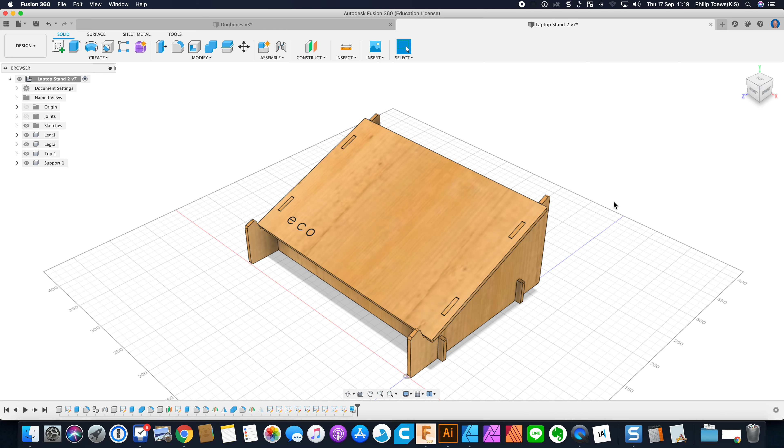In this video, we are going to learn how to output our files on the laser cutter from a 3D model. In this example, you can see we have a laptop stand, and we want to get these parts into a format that we can then send to the laser cutter. This takes a few steps, so pay attention.

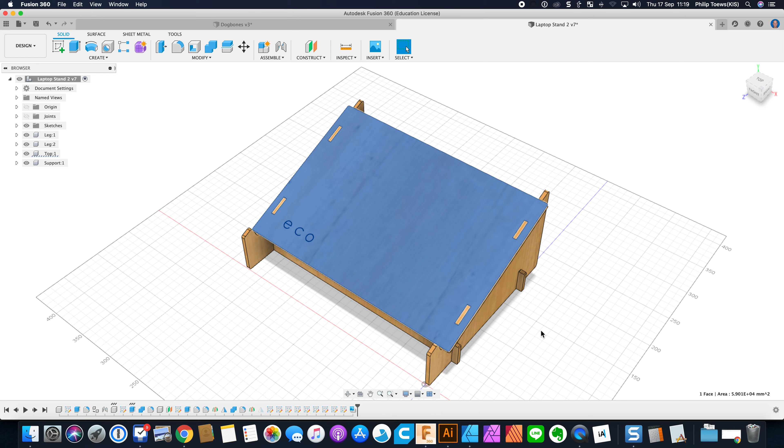Here we go. The first thing I want to do is cut out this top, and you can see when I click on it, it's got some holes cut for the joints where the legs fit in, and some nice rounded corners. By clicking on it and selecting it, I can see its actual sketch profile. I need that sketch profile exactly as it is in order to get it into Adobe Illustrator.

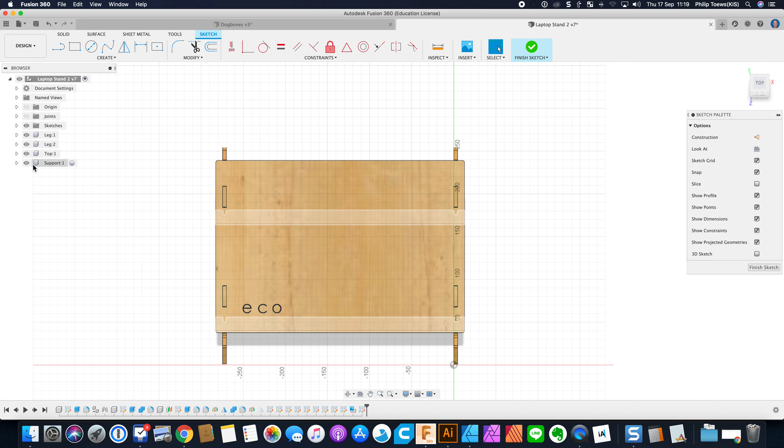So I'm going to right click on it and say Create Sketch. Once I create that sketch, I can actually finish the sketch. I don't need to change it at all. If you want to see what the sketch looks like, we'll just turn off the visibility of the parts, and you can see that we have this sketch. If I mouse over it, you can see the sketch profile there - that's exactly the shape we want to cut out on a laser cutter.

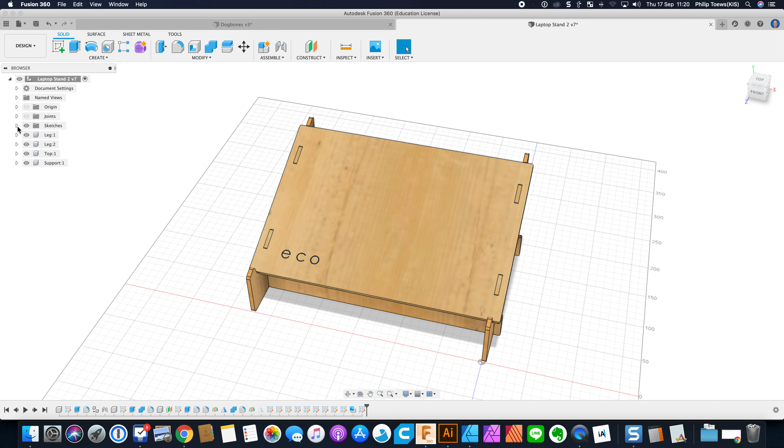I'm going to finish my sketch and then go back into my normal 3D design environment, and in the Sketches folder there should be a new sketch. I'll twirl down that disclosure triangle, and there it is, Sketch 18. That's the one I want.

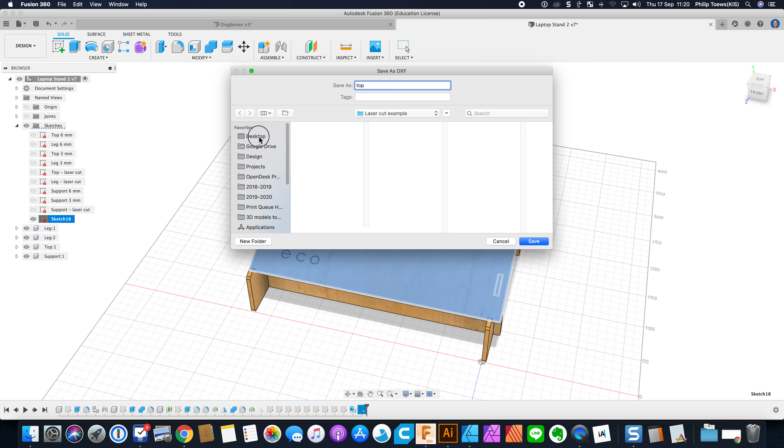So I will right click on that sketch and say Save as DXF. That stands for Drawing Exchange Format. Now I'll give it a name, and I'm going to call it Top. I've got a folder I already made, I put it on my desktop, and there's my laser cut example, so I just say laser cut example top, and I save. I'm going to switch over to the Finder now, and under desktop laser cut example, I have my top.

I will then open this file in Adobe Illustrator. To do this, I'm going to right click on it and say Open with Adobe Illustrator. And when I come into Adobe Illustrator, I'm going to get a dialog box.

You need to set the scale of the import to 100%, and it should scale 1 to 1 unit in millimeters. Make sure you change it to millimeters. Also make sure you have set this to 100%. I will then say OK. It'll take a couple seconds to think about it, and it will render that DXF in a format that Adobe Illustrator can read. And here it is.

So I now have all of the sketch lines that I need. These lines are actually just the strokes. You can see that when I select them and come over to the color panel, the stroke has a color, but there's no fill, which is exactly what we want, because the laser cutter will follow that stroke. It's going to follow the path, and the tool path for the laser cutter is determined by the stroke.

Now, we're not quite done yet. We need to get this ready to be laid out so we don't waste material. To do that, I'm going to make a new file, and set that file to A2 size dimensions. I've got the A2 dimensions here. I'm going to set it up into landscape mode, and make sure that the color mode is set to RGB, because I'm going to make an RGB document.

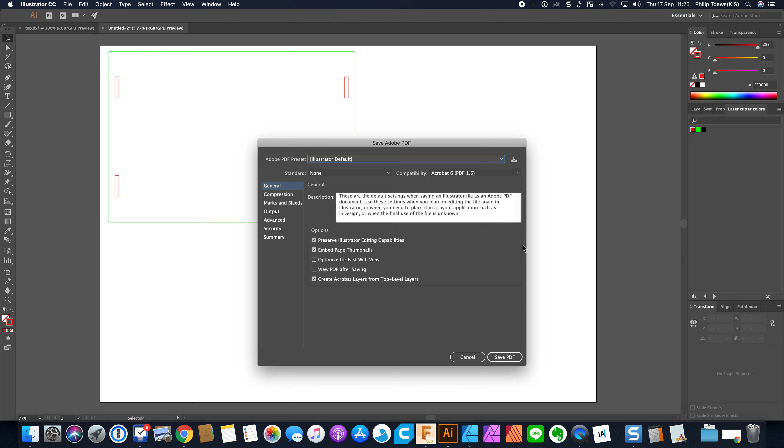I'll call it Laser Cut Me, and then I'm going to save that file. This is the file that you would send off for laser cutting to the workshop. You would probably share it with our technician, Kunjut.

So there it is. I'm going to set the Illustrator default Adobe preset for PDF. That's fine, and I'll say Save PDF. Once that file is saved, we're done. You would email that file or otherwise share it with the technician, and you'd be ready to go.

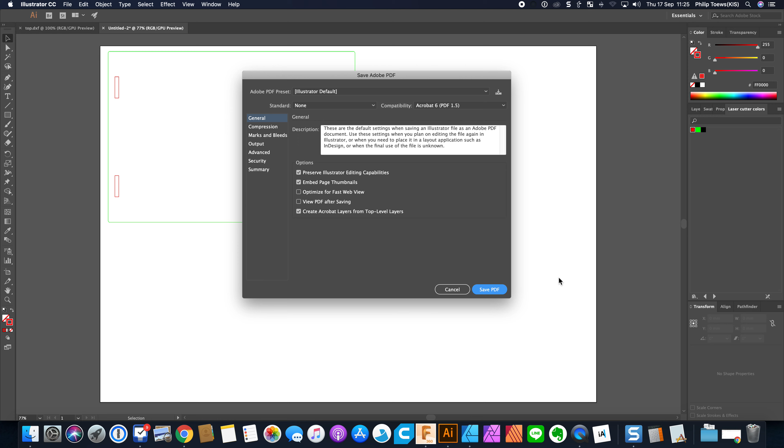So I hope you do lots and lots of laser cutting. That's how we do it.